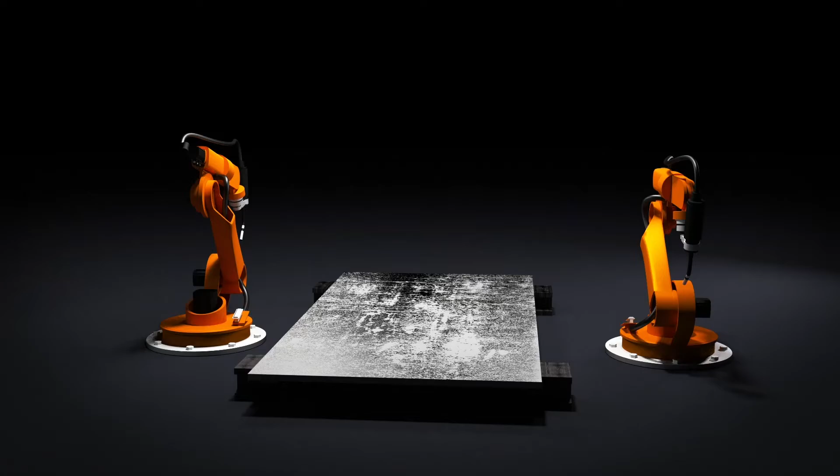Okay, so it's time to get into this first round of everything here. So I got the eagle all done, sending all the parts, so we can get after it.

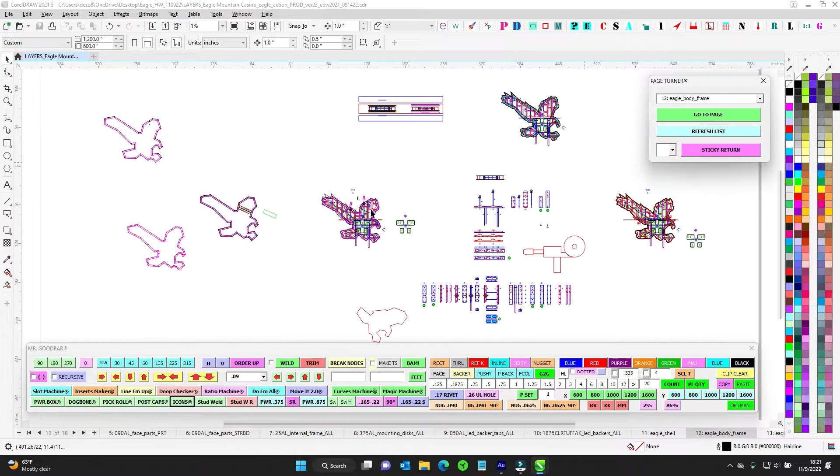So there's a lot of moving parts, as you can see, but a lot of it is just kind of what we do. It's just on a larger scale. So let's not let that intimidate you as far as all the stuff that's coming at you on this one. It's going to be pretty straightforward. We're visiting some of the stuff from like Indio letters and stuff, so it's going to be all good.

So let's get into the lay of the land. We do have a port and a starboard. That's based off of the beak. The beak is the bow. The tail is the stern.

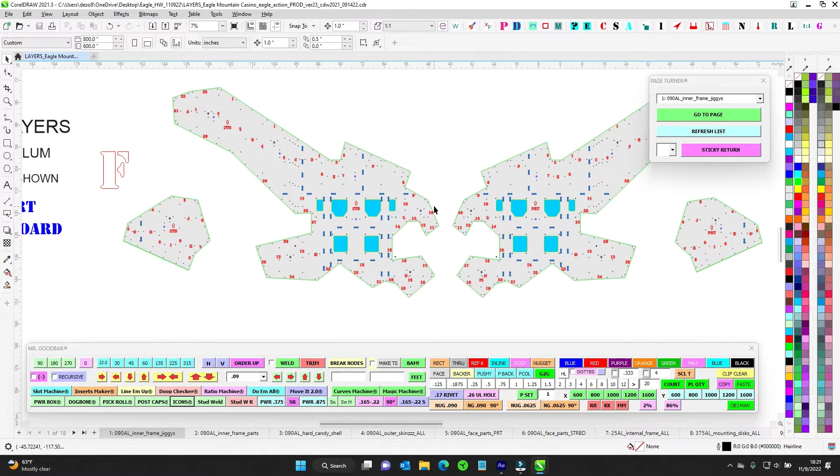So anything on the left-hand side is the port. That's where you pass the Dutchie. And then the starboard side. So look for STRBD and look for port.

This one has a gang of reference numbers all over it. You can remember my other video I did about augmenting that so I can get these numbers placed around. So look for all these little jiggy things.

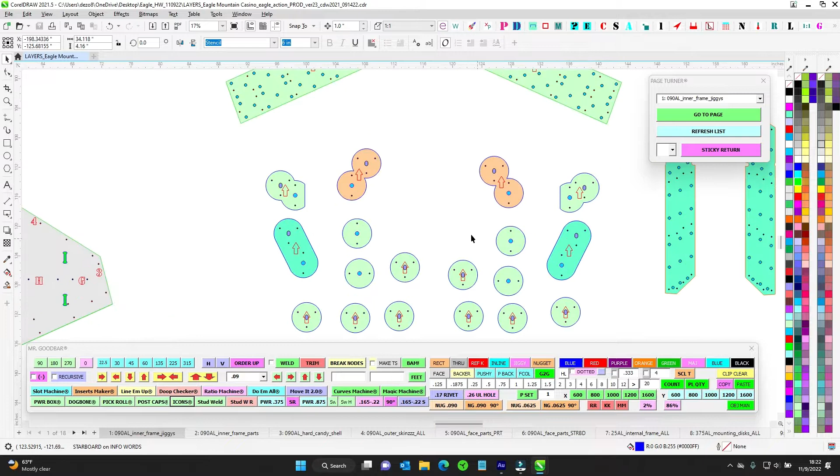This is a la Indio letters. You got the backer spacers because you're going to have that void. And look for these splice pieces here. We'll go over that. You got all your inner frame parts, and you got your hard candy shell. Look for all that. Port and starboard.

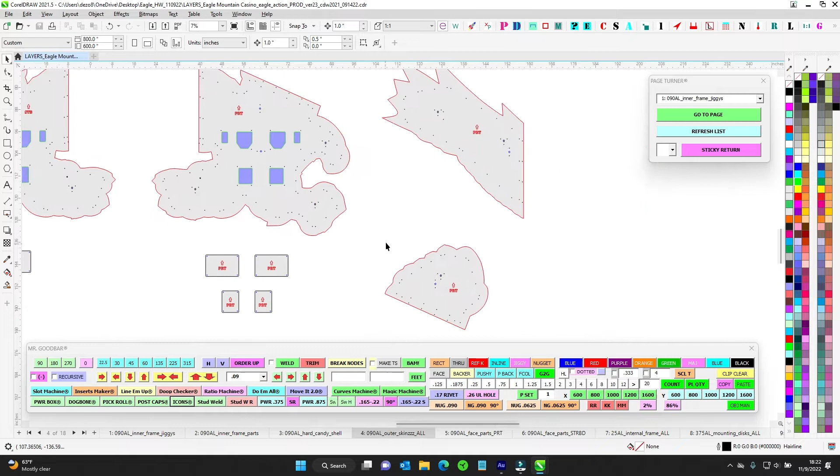Those are all together. And then you have your overall large skins, your finished skins. Look for all these guys. You got these little doors. Keep those in mind there. And then we have the actual faces. These are going to be the reverse channel faces for the eagle.

So look out, I got some keyhole slot coming. I did this piece as a tester, so this will look familiar. So you're already sort of familiar with this. So this one is actually port, and this one's actually starboard. So obviously everything's just mirrored.

So parts with an S on my chest, look for that. Quarter inch internal framing, look for all these parts here. We're looking for some of these are all the way through, some of them aren't. So pretty much the greens here are going to be all the way through, so make sure those are cut properly.

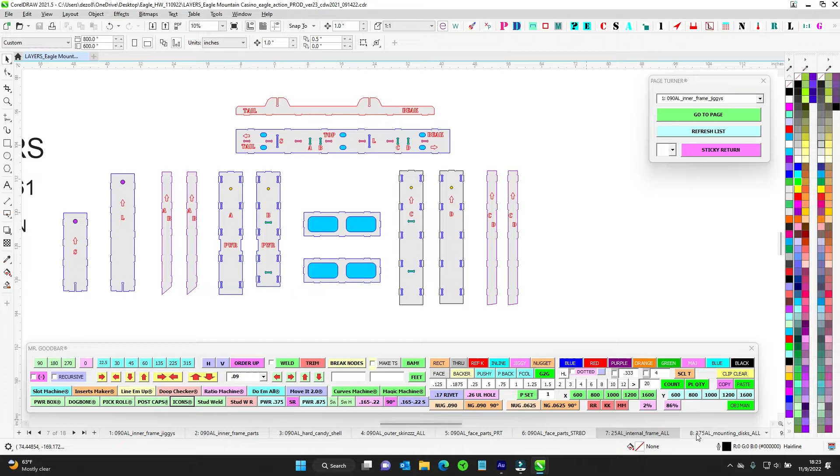And we're getting used to seeing these. So you got some 3/8 little slide collars there. And we all know what these are, these are little stubbies, little 1-inch tabs. And those are for both of those there.

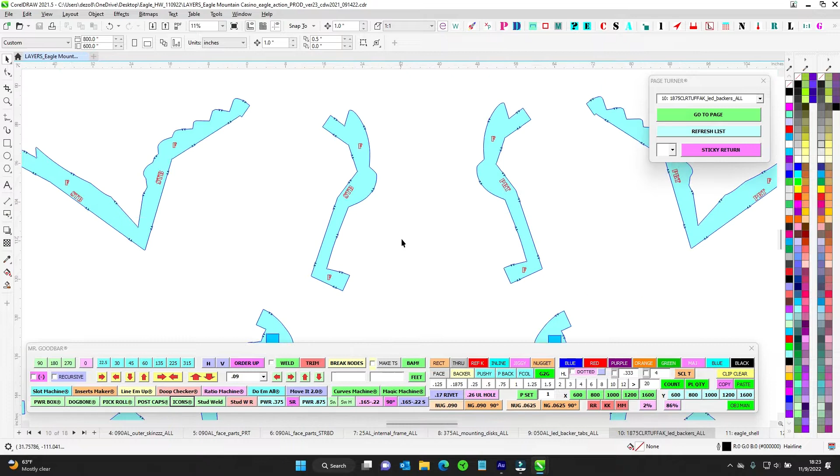And then we've got our Tuffak polycarbs like we do for our reverse channel. So we'll go over those. All right, let's get into it.

So what we're going to do is we're going to basically work from the inside out. So you're going to build this frame, get it all ready. And then once you're done with that, then you can start on both faces. So let's start with the main frame though. We haven't built it this way yet, but I think it's gonna be pretty cool. It's gonna speed things up.

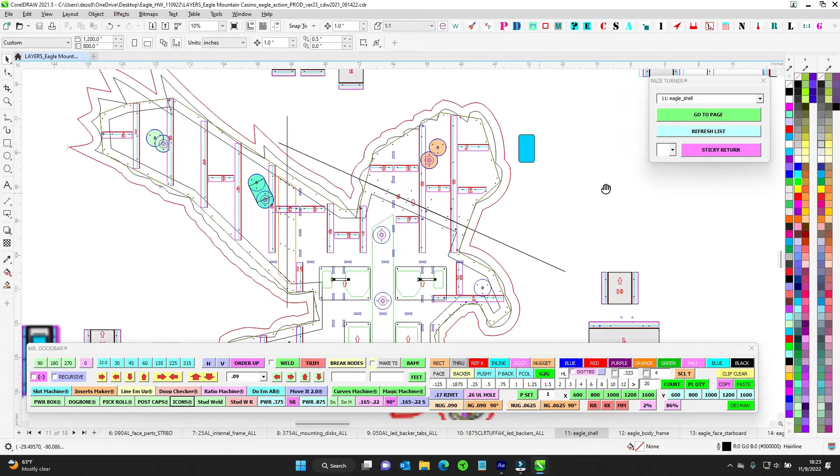So you're gonna look for all these parts that have letters on them. The letters are horizontals, and the verticals have numbers. So you're gonna work your way over here from the wing, and you're gonna work your way with the A and the B over here, and then you're gonna work your way down 1, 2, 3, 4, 5, and work your way through.

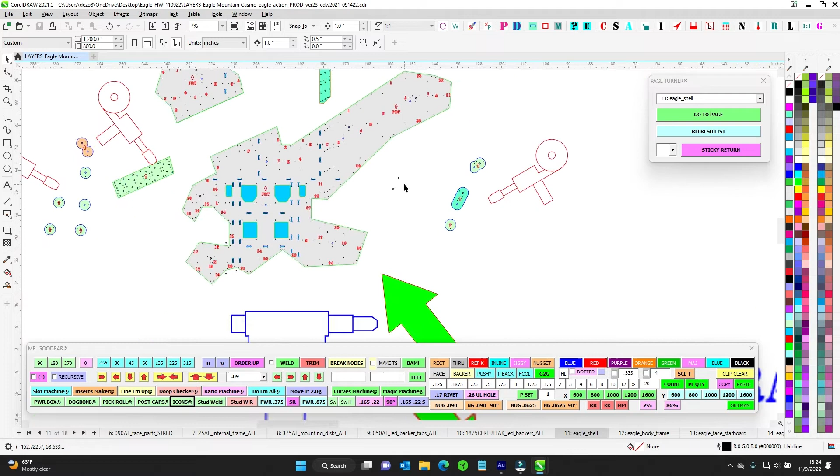What I'd like to see here, it should all work out, is that you're going to just rivet these two basically inner faces, the inner jiggies. These are big giant jiggies basically. You're just going to rivet those to these guys here.

Now you're going to want to make sure these flanges are all facing the right way. So reference this PDF that I'm going to send you and double check and make sure that everything is facing the proper way. Otherwise, this might poke out. You're going to have, it's going to be sad.

And then a lot of these have tabs that are going to stick out, and that's actually where you're going to through-bolt the slider doohickey there, so that way the frame grabs on the frame and has that strength.

So you can see where everything's put together. Like number 5 here has that flange poking out. You're going to make sure that gets clecoed in, and then that's going to support the whole face structure. So it's kind of important to get those going. Get all this bent up.

But before you rivet this together, you're going to build the inner frame. That's where we're going to start, the inner part, the 1/4 inch. So that's going to be the body frame here.

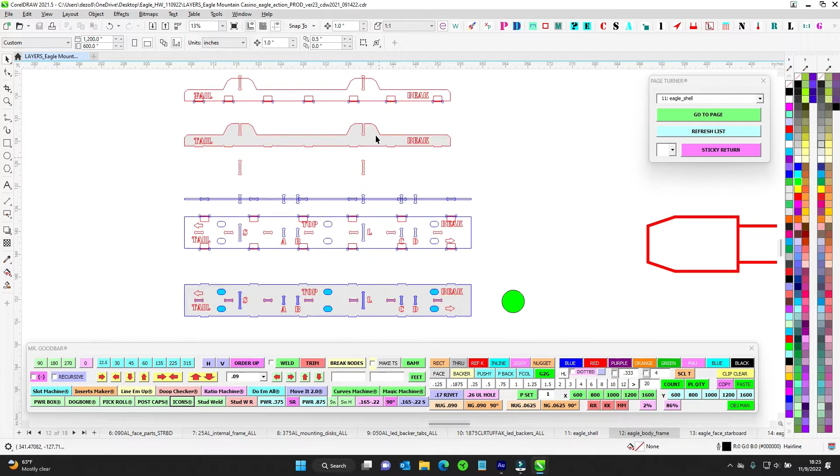Again, this isn't super hard, super difficult. So you've got two long ones that are going out, a long and a short. Those are going to be your lift points. So it's going to look like this all together.

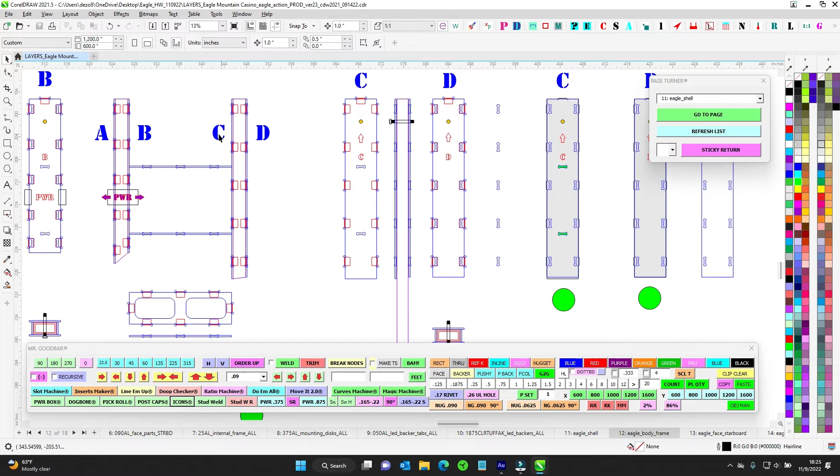And then what you're going to do is create sleeves for the 2x4 steel that's going to slide up in there. So you can see this is the side profile. You've got a C and a D, an A and a B, and then two little nuggets on the sides here that's going to basically create a tube. And that tube is going to slot into the bottom of this piece here.

Now you'll see this part goes to the tail, this part goes to the beak, and that's right here. So you can see what's in blue, right? So there's the sleeve there, there's your A and there's your B.

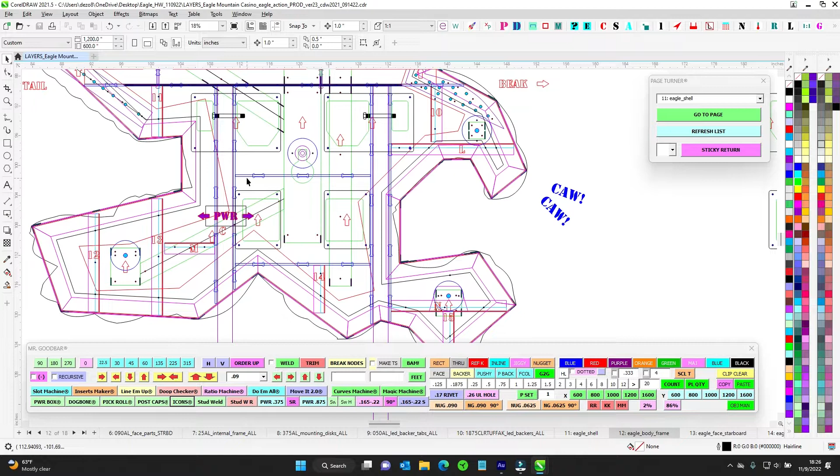And then this will be your in-between pieces. And then you'll have your C and your D here, and you can see where the tube will slide up in there, and then it's going to bottom out across the top.

So the top will have this rib across here, and then this part here will be a brace to help stiffen that. So if you're looking down at the top, you're going to weld that. And then these two guys here will have their slots right here. These will dog bone in to this guy here, and that gives you your lift points.

And so that's how install is going to grab, put clevises in here. They'll put clevises in here, and then they can lift this bad boy up and they can get their caw-caw on. So you're going to start with that.

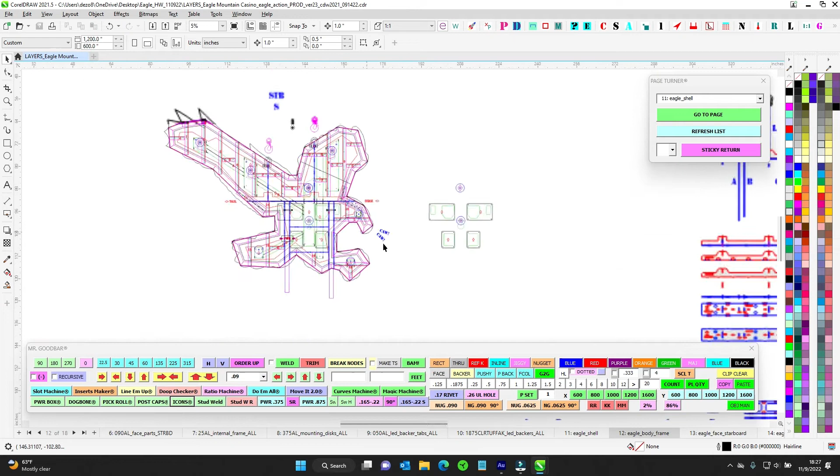I would tack this all together, weld it up good as best you can. And then all of these external dog bones, you can see here on this whole thing, these are going to slot into the Jiggy.

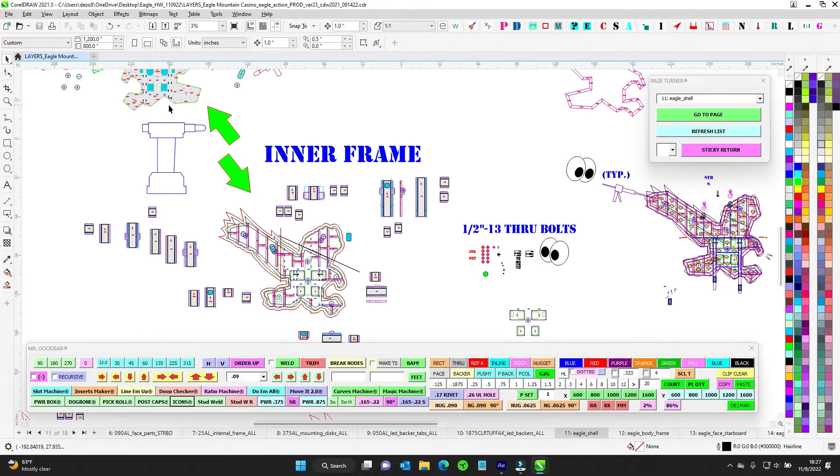So that's your side jig. You can see where all the dog bones here are going to correspond to that frame. So you get that frame built, get it kind of all put together.

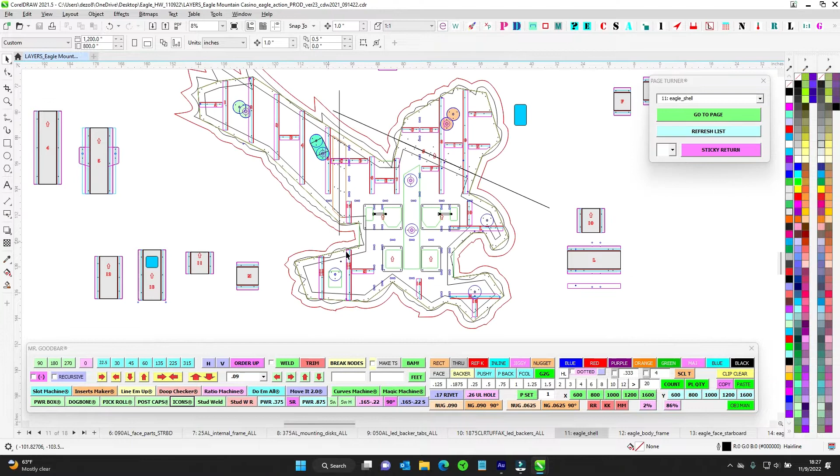And then I'm thinking what you can do is - again, I haven't done this before - but rivet one side. So get all of these, I would encourage you to Cleco it all first, get it all set. And then go ahead and rivet all one side and get all of these braces attached to one side of the jig.

Once you get this all put together, go ahead and lay it in there and make sure that it's all sexy. And then go ahead and lay the other jig side on, the other jig frame side, and go ahead and lay that on there.

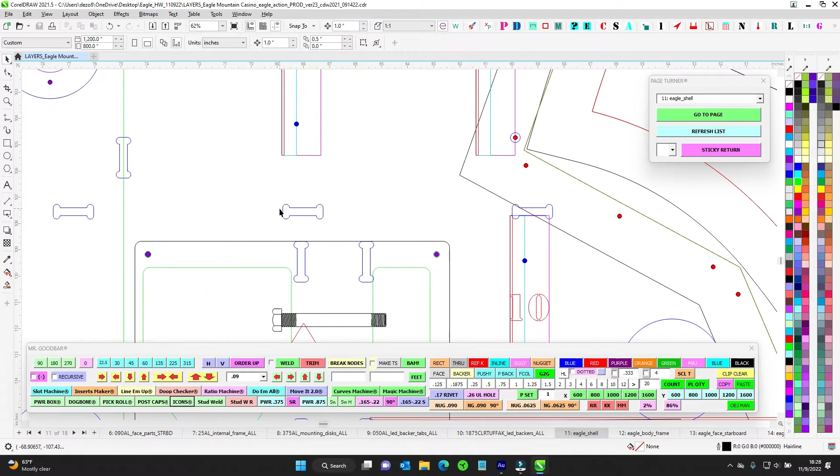And then you're going to have all of these dog bones exposed, so you can actually tack these dog bones, but anywhere you can get the gun in, go ahead and weld the frame to the 090, right?

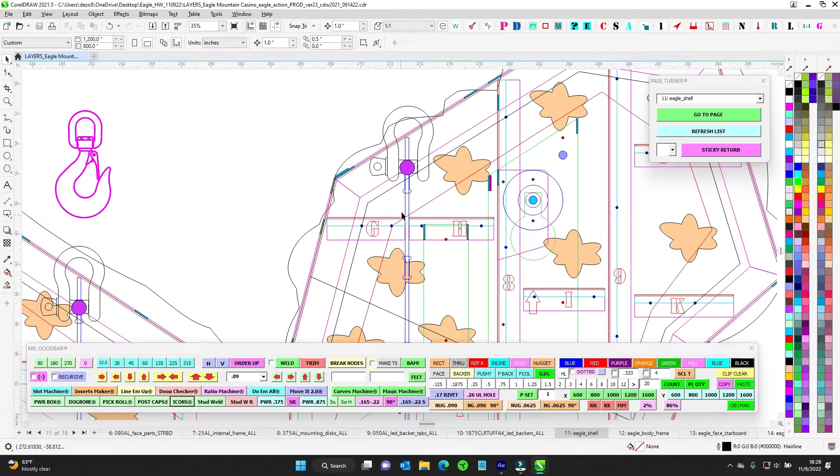So like here, you'll have an access hole here, and you'll have these two braces right up against this quarter. So if you can get the gun in there and kind of attach this brace to this quarter, that will help. It doesn't need to be crazy welded, but make sure that you can get in there.

You'll have access little doors here, so you can kind of get the gun in there and tack the 090 to the quarter here. You'll have access to these cross bars here, and you can get the gun in there and kind of tack to there.

So essentially, though, you're just going to make it nice and strong. You'll see here, you'll have an access door right here, so you can get the gun in and attach G and H to this vert. And then that way, when they go to lift, all your strain and all your stress is being transferred across this whole 090 face.

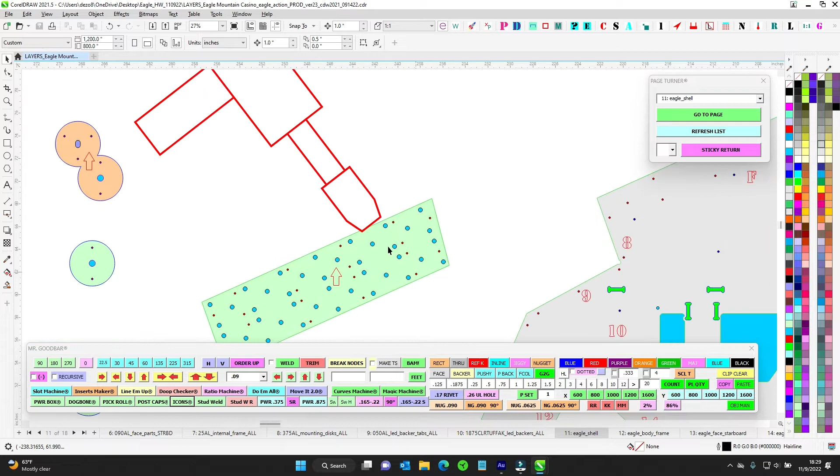Backing up a little bit, we have the braces to bring these together. This is just going to be on the surface. I gave you plenty of 3/8 holes here to plug weld and tack, so just Cleco this together. Do this on the surface, on the top outside, so all of these letters and numbers are going to be facing out. That's what we want, so you can see them. So go ahead and put this to the outside.

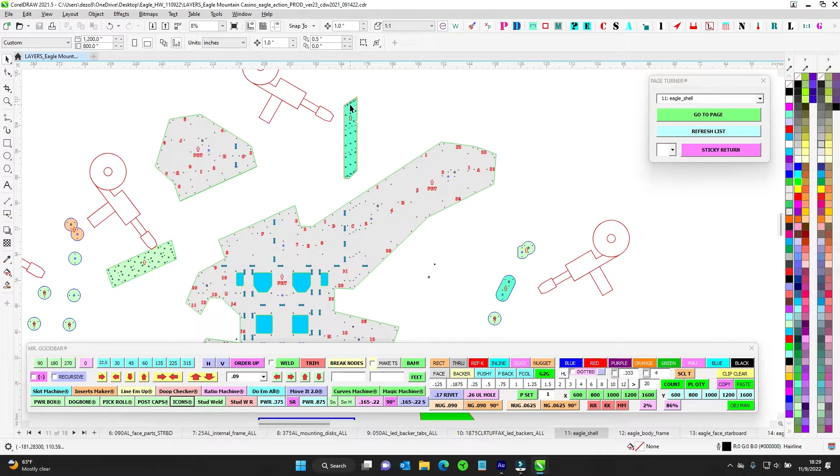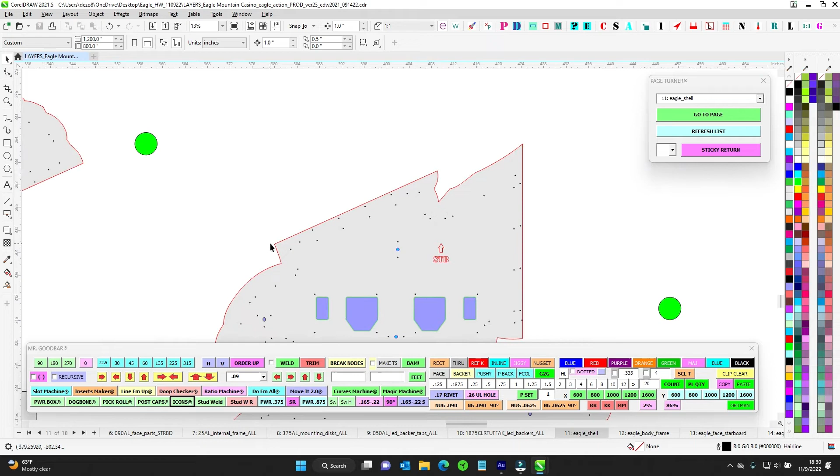And then same thing with this. This is actually a face seam. This is a redundant seam that doesn't do anything here other than you're going to build up this 090. So that way, when you go to put these faces on, you see that these were big enough that I had to blow these apart into 3 pieces just to fit on the router. So you're going to have to stabilize this seam. And so this seam, we're going to utilize the seam on the other one, and it's going to stabilize. It's going to do double duty.

So you're going to take this one, you're going to tack it to this, but you're going to grind it smooth, because then the top of this is going to be the stabilization seam for this one. But this one has its own stabilization problem, and so this one is just a stabilizer for that. This doesn't do anything for this other than just gets attached to that.

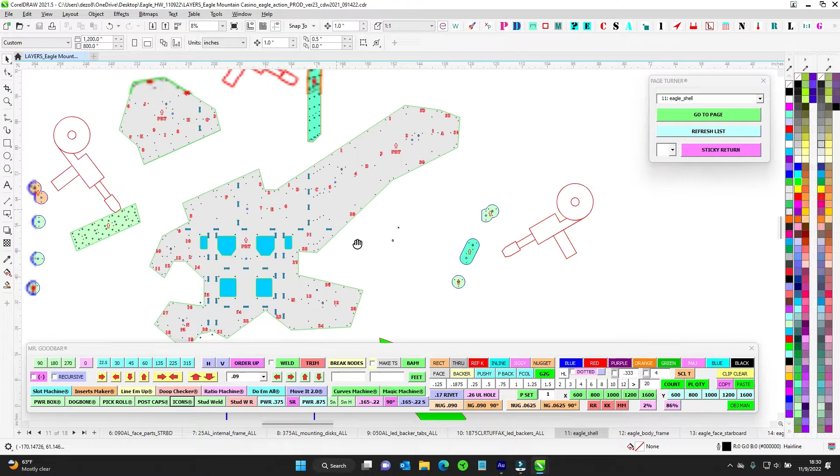So you're going to put that on there, tack it up nice, but we don't want to warp it too much. And then this one here, tack it up there real nice, but make sure it's clean. And the same thing here, make sure this is nice and clean and booger free, because then you're going to lay this bad boy on there and it's going to sit on that.

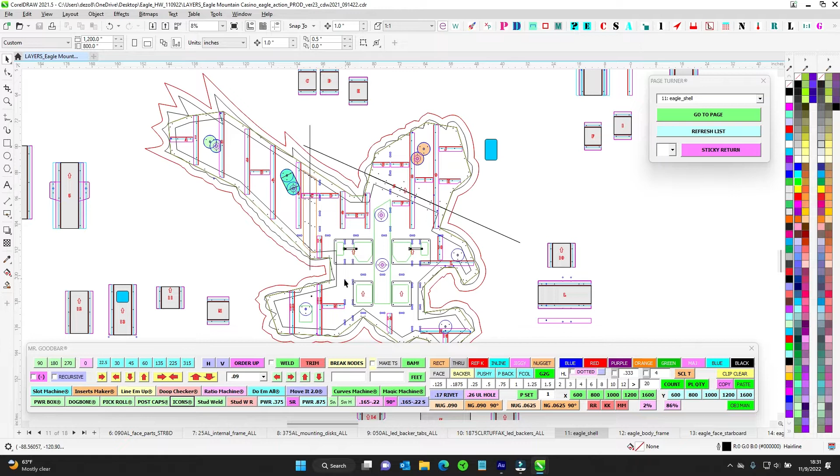So again, probably want to get this. Okay, so let's review. Do the blue frame first, get your quarter all tacked together, get it welded, and then put these together, seam these together, and then go ahead and tack or rivet one side together. Go ahead and put the 1/4 inch frame on the one side, and then bring the other face in, get it all dog boned aligned, maybe give it some tacks, and then finish riveting. You're just going to rivet all of this together.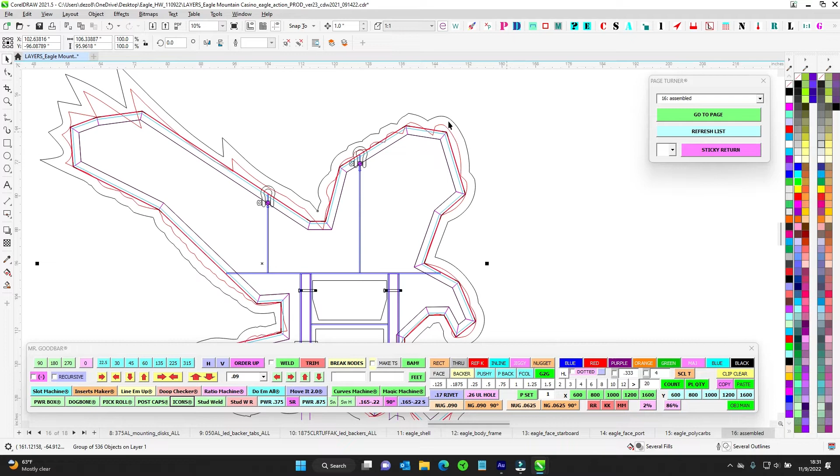Because we're going to have a gap, I already kind of talked to you about this, like talked to Adrian, but because this main face, right, is - let's see, I have an assembled version of that. That's right here. So you can see the black face here. Wow, that's a bad term. The face of color here is going to get laid all the way around this perimeter on this 2-inch framing.

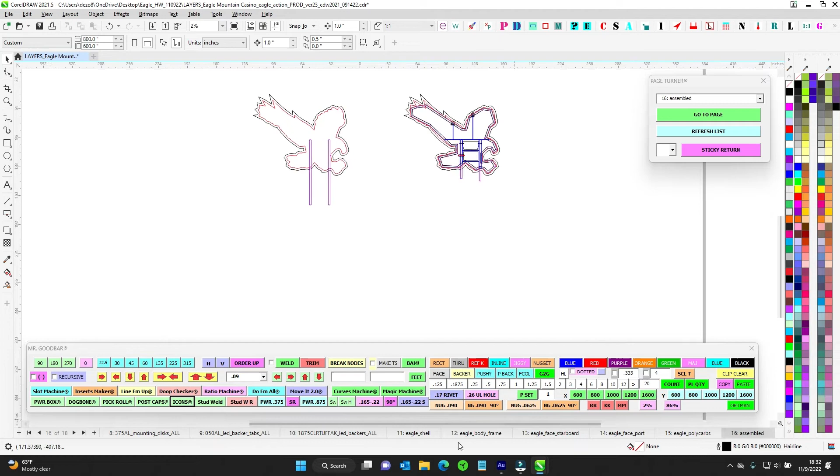Essentially, just like the Indio letters, this is going to be an 090 void all the way through here. So basically, you could push on the main back or the main face and go clunk, clunk, clunk. And so in order to have places just like the Indio letters, you'll see that these circles will want to get tacked on there, and those are going to be kind of spacers. That way we can bolt this together and it doesn't squish, just like the Indio letters.

So get your 1/4 inch frame in, get all these frame pieces riveted, and then go ahead and tack on all these little circles. Again, reference this, but make sure your arrows are up so you can see where that's going to go here. We're going to have a circle. Yes, jumping around, just bear with me here. So we're going to have a circle here at the feet.

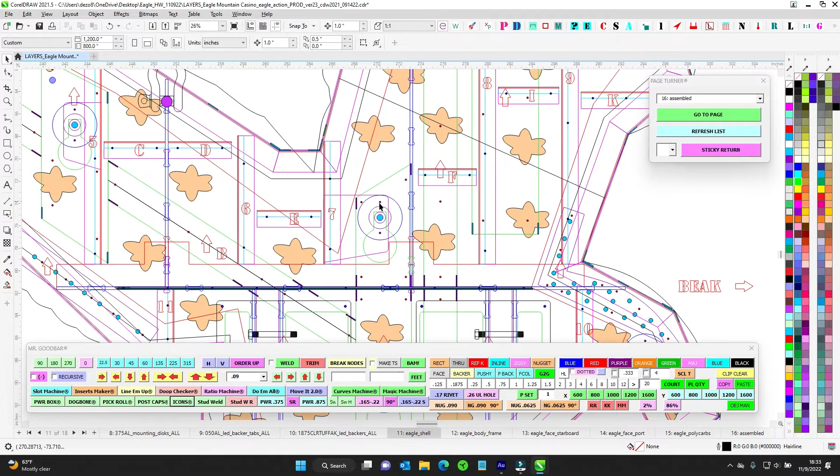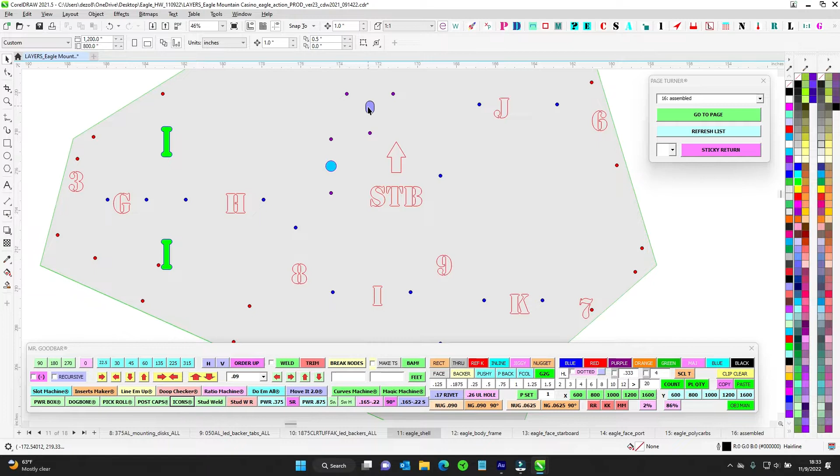We're going to have the circles at the tail, a circle here at the eyeball, a circle in the middle, and another circle here. This one will have a joined circle, and these will be weird-shaped joined circles, because we're not only having slides, but also using 5/16 hardware to nail this down. So this will be the 1/2 inch bolt hole for the slide for the 3/8 puck, but up here will be a riv nut that actually holds this thing on.

I kind of joined these two so that way you don't have a bunch of discs. You can see where this one is a weird shape, because the slide puck will be here and the 5/16 bolt hole will be here. Just make sure these pucks go in the right spot. I joined these up together as like a little oval here.

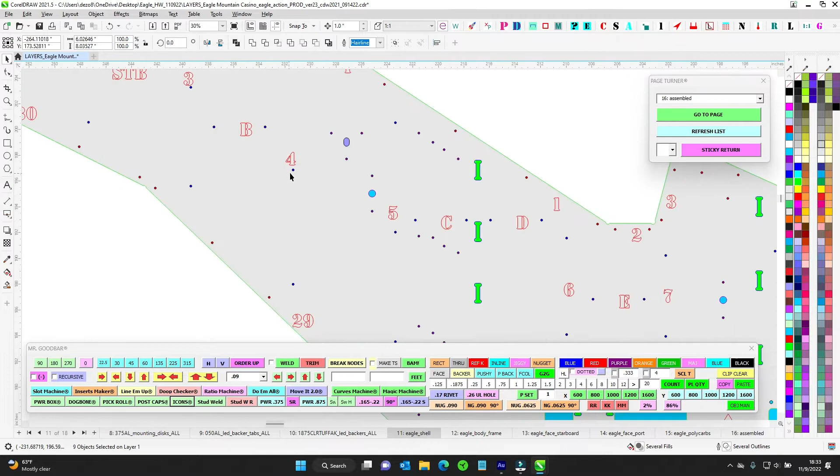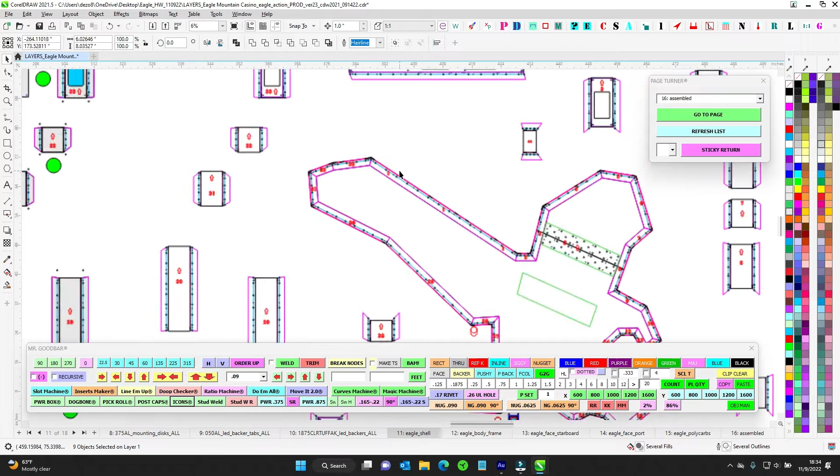Get these tacked on, get them cleaned up just like Indio, and then we're good to go there. I think once those are all done, you can start in with the hard candy shell. You can see where everything's numbered. It starts with 1, and you work your way around 3, 4, 5, and you're just going to Cleco this thing all the way. You got the 1 there, 2 there, 3, 4.

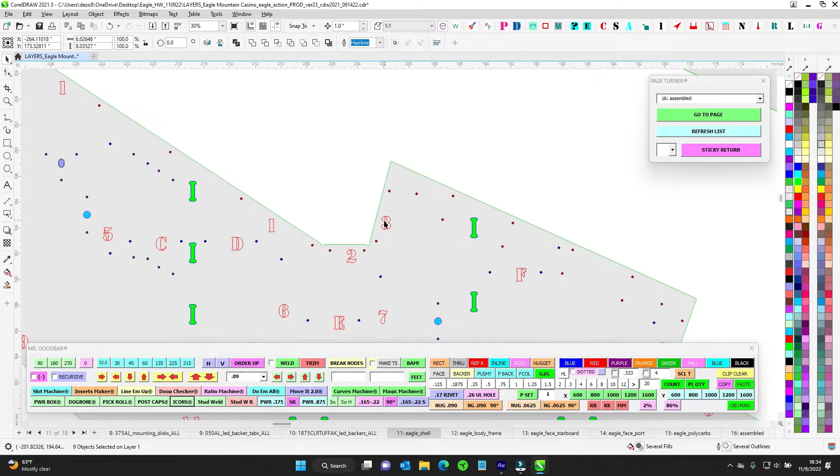This is actually probably going to be almost kind of fun. You'll have all of this riveted together. It'll all be braced, tacked and welded in. So this thing should be really rigid, and it shouldn't be a problem. Just work your way around. Look for the 1s, that's the number piece. There's 2, 3, 4, 5, 6, 7. Just work your way around and all the pieces should go together.

And then you're just going to go ahead - and I gave you this because I realize there's not really going to be any access to the inside, so this is going to be completely welded on the face. You'll be able to weld on the flange here, tack it on the flange, but I gave you plenty of 3/8 plug weld holes so you can just go ahead and tack these up nice, just like we do.

Go all work your way around. I got in between seams here so you can connect these, nice and strong. You can see I made little notches for you here so you can plug weld those up nice. And then you're just going to grind all that smooth.

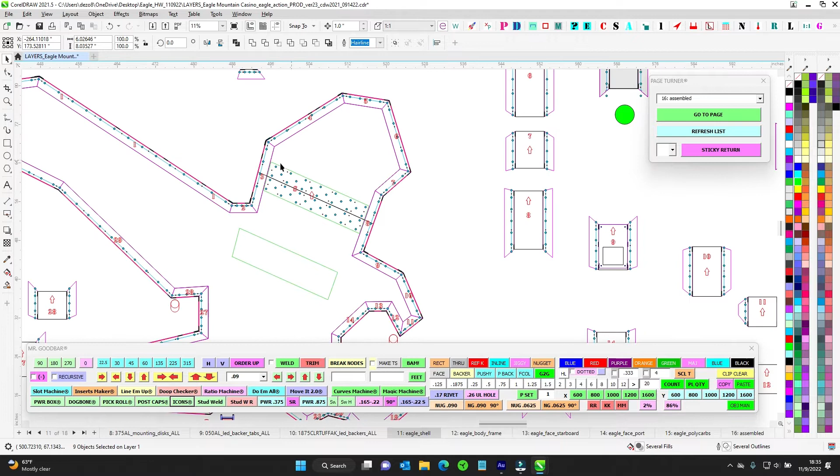Again, you can see where this is going to be the bridge. Go ahead and grind that smooth, and grind this seam piece there. Make sure this piece right here, make sure that piece is ground up nice.

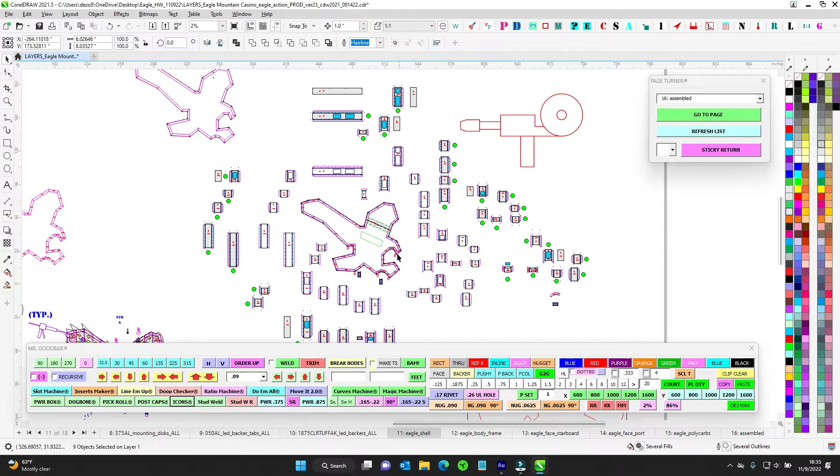So we got that done. You got all these tacked in, you've got these all in, these little discs. So I think you are ready for putting on the main face, the pretty face.

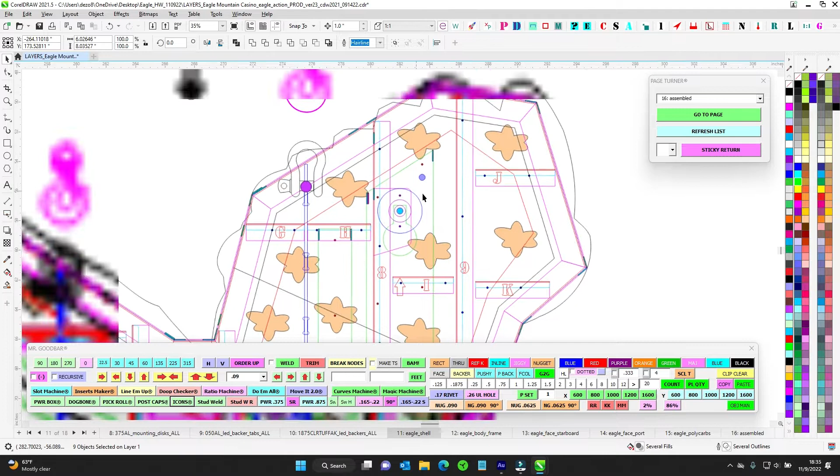Just like Indio, I would suggest a couple of you pop Lord's guns. You're going to burn a little bit of Lord's because, like we said, you're going to have the perimeter at 090, and all of this is gap that kind of needs to be filled. We brought in that DTM stuff - if you think you want to roll with that, if you want to do a test, we're pushing up against the expiration date. But again, you can see if you want to use it or not.

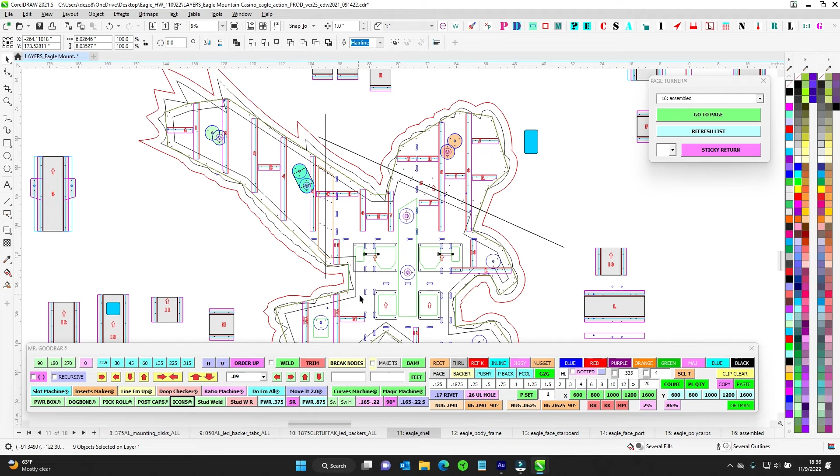But otherwise, we got to fill all these voids in between where all these little circles are here. You can see where the circles are there. So basically everywhere there's not a circle, we got to build up Lords, and that way it'll kind of float and be connected well. So that'll be kind of a procedure.

But then once we have that all set up - for reference here, STBD little reference, or the reference kiss does go inside. On the Jiggies here, you see all these. I want these poking out so you can see the numbers. But on these ones, you're going to go ahead and put the reference to the inside.

That way it's clean and it's nice and slick. So go ahead and get the outer skins then. Like I said, you'll have all that done. Get this all cleaned up.

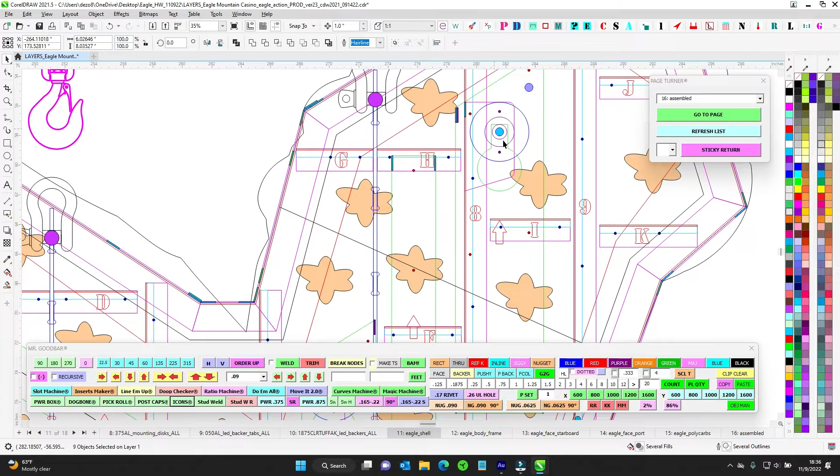One giant Lord's party. Make sure you put those sploogies on these right here, so that the welds Lord up nice on these. Make sure you do just like you did with the Indio letters.

And then once that's done and you've got the faces on, that pretty much does it for this. So again, there's a lot going on, but it really isn't.

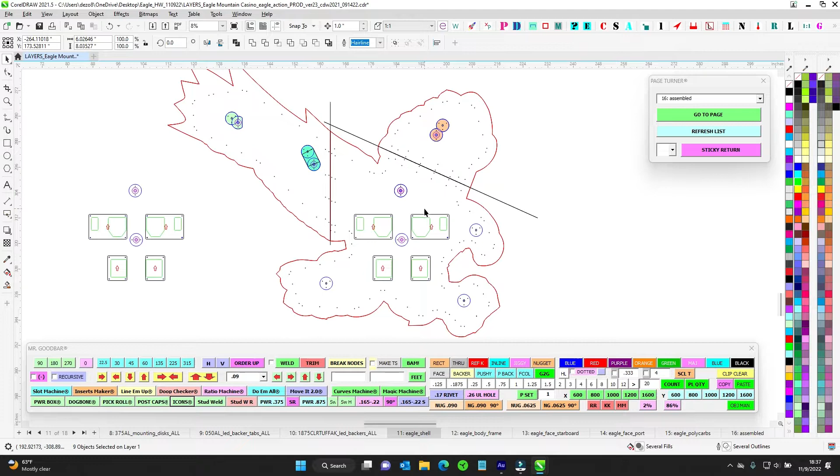Here's a good example. Essentially the 2-inch framing is it. And then these are the only other spots here that the eagle's going to actually touch. So all of this needs to be filled. Whatever you think works, you can put a little bit of Lords right there too.

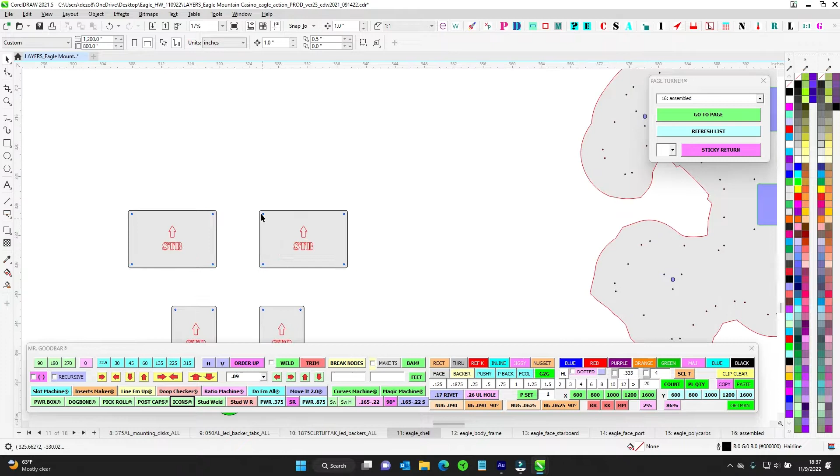But these are going to be outside access doors. These actually sit on the outside on top, so there was no reason to recess that. You're not going to see them.

Okay, so that's outer skins. That's the main part of the eagle. You'll have your sleeves that go in there, I already have holes for that. And then you've got all your doors.

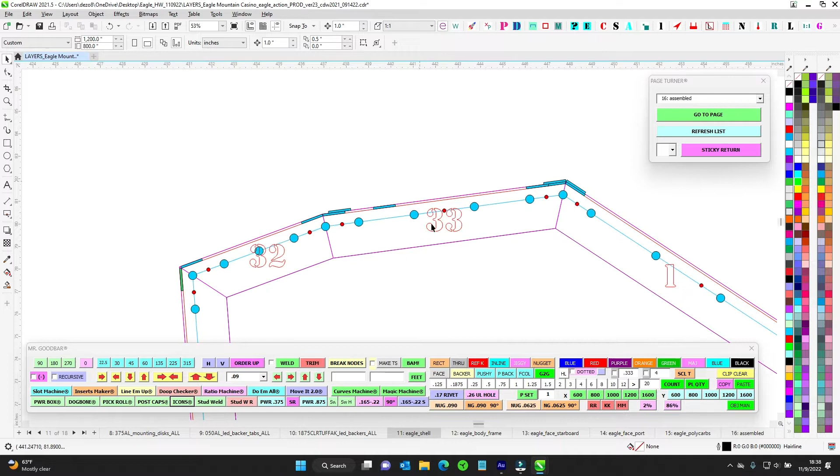So you can see where 33 will go with 33. Everything that's basically facing up, I put doors for access. So that's kind of how that goes. But anyway, so there's that. So we've got the frame, you've got all that kicking off.

So let's talk about faces. Faces really aren't that big a deal. These are going to be more like the agua caliente, the big palm trees you did, where you're going to bring these together as a seam. I already talked to you about these seams.

So you're just going to clamp these, bring them together, and you're just going to rivet them, just a cold seam. You're just going to rivet right across. And then before you do anything, go ahead and put these seam pieces in, similar to like you did on the other ones there with the eagle shell.

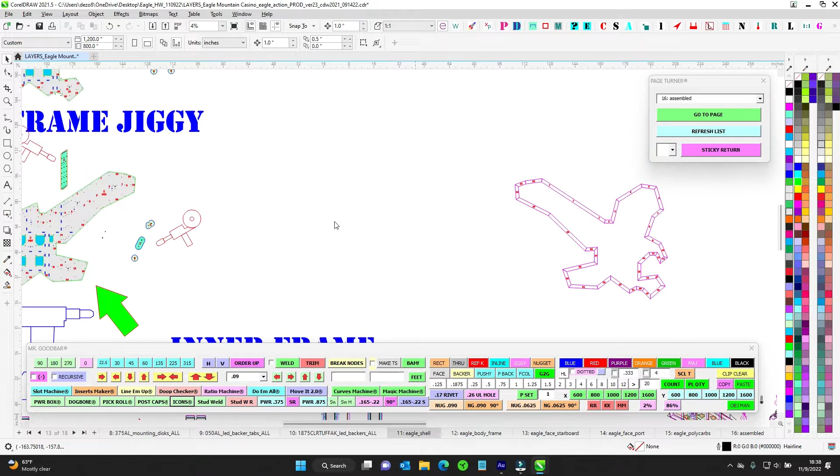Similar to this, you're just going to tack it together, and that's going to stabilize it, because you're going to have all of this unstabilized face. So all that needs to be stabilized. You're going to have a straight piece along here, and then you're going to have another piece right here. So go ahead and tack that in, and that's going to bring it all together.

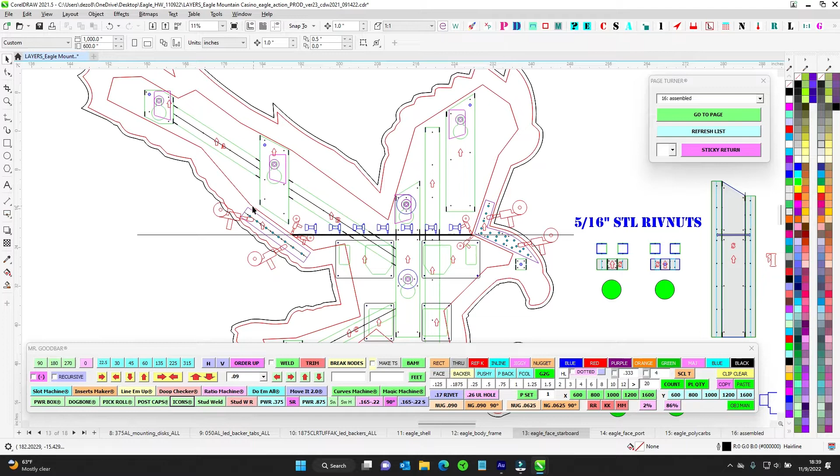So then once you have the face, these two pieces joined, and you have these splice pieces, you can see how much that's a lot to leave unstabilized. So once this is all stabilized, once this is riveted together, then you're going to do like you do with the agua caliente. You're going to stomp 22 strips at 1 inch depth.

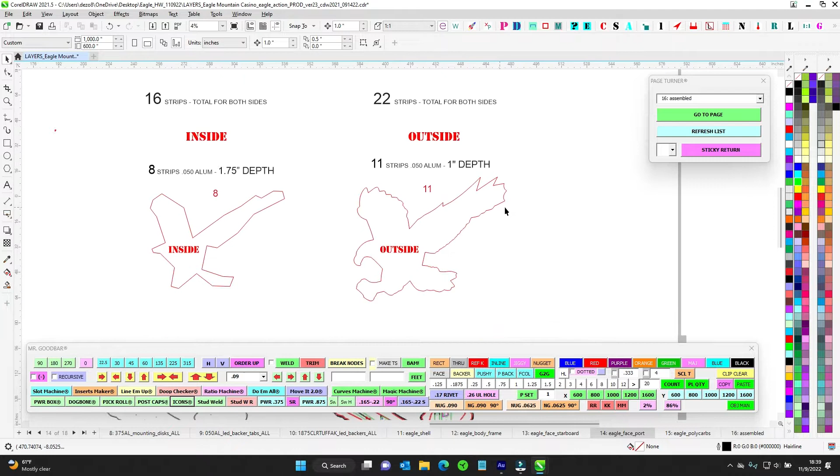So 22 strips, .050, 1 inch. That's for the outside of the eagle kiss. And then you're going to do 16 strips for both, that's for both eagles at 1 3/4 inch, and that's going to be for the inside.

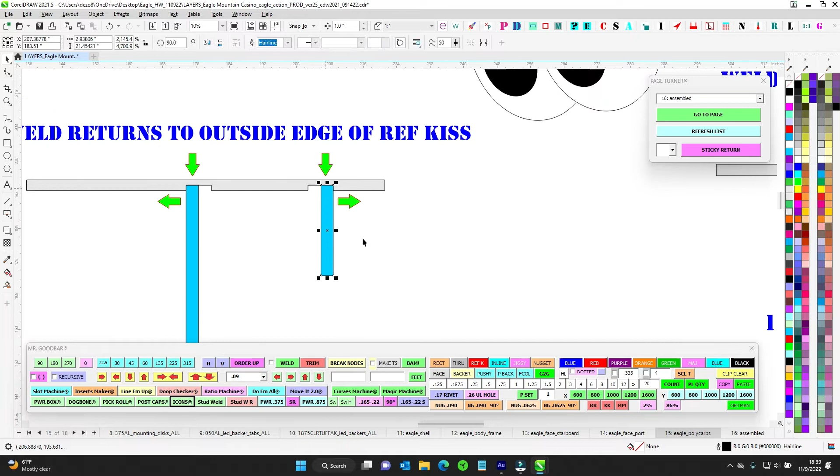Then what you're going to do is, just like I got here, you're going to push to the outside. You're going to push the return to the outside of the scribe. And then you're only going to weld on the inside. Don't weld on the outside because you can see it. We want to keep it clean.

So go ahead and just weld to the inside of the channel and do your 1 inch first, because that way then you can access your 1 3/4 inch. So the 1 3/4 inch goes to the inside and the inch goes to the outside. So you're just going to follow the reference kisses here.

So the 1 3/4 inch will be around this perimeter, and I tried to square it off real nice for you so it's easy to lay out. And then you do have to follow for the 1 inch. You're going to have to follow that a bit to make it look nice, but it's going to be cool. So you're going to do that with both faces. You can just kind of do both here.

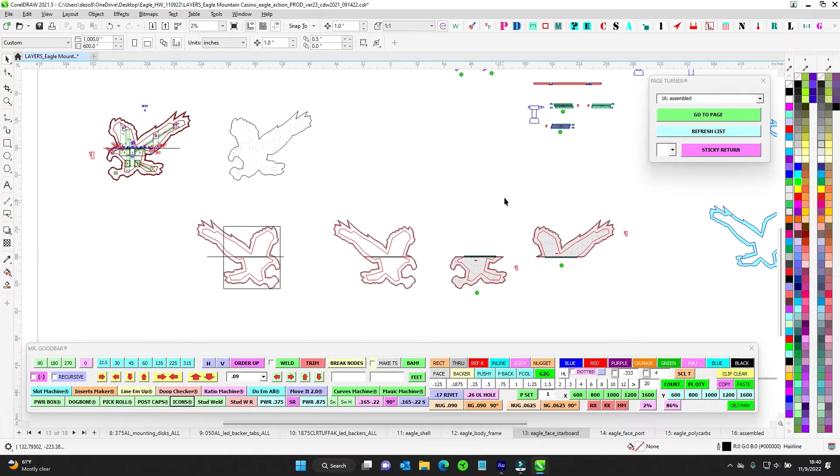So get your seam stabilized. Go ahead and go all the way around, first with your 1 inch, and then go around with your 1 3/4. Weld to the inside, don't weld to the outside so it looks clean. Then we're good to go there.

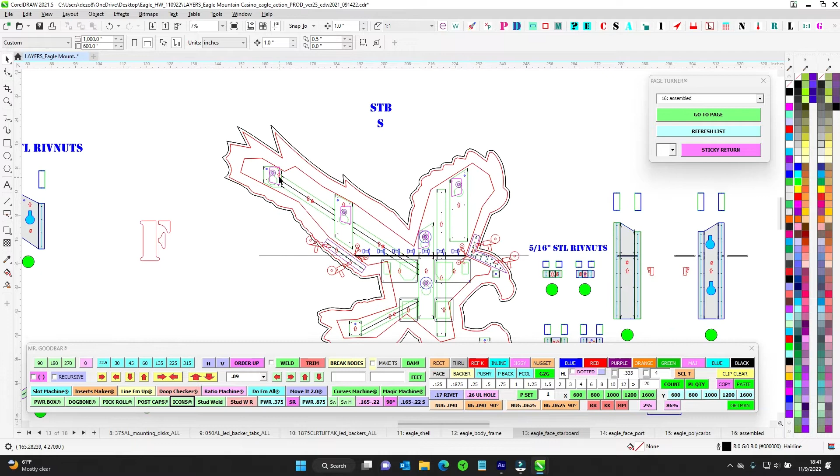Then you can go ahead and assemble all of your frame pieces for getting those mounted to the inside. Once you have your perimeter welded up and nice, then you can see how these things are going to fit. So you're going to go ahead and rivet. Remember, we already kind of made this one, so you know what we're dealing with. You're going to slide one into the other, and it's just going to be a big rivet party.

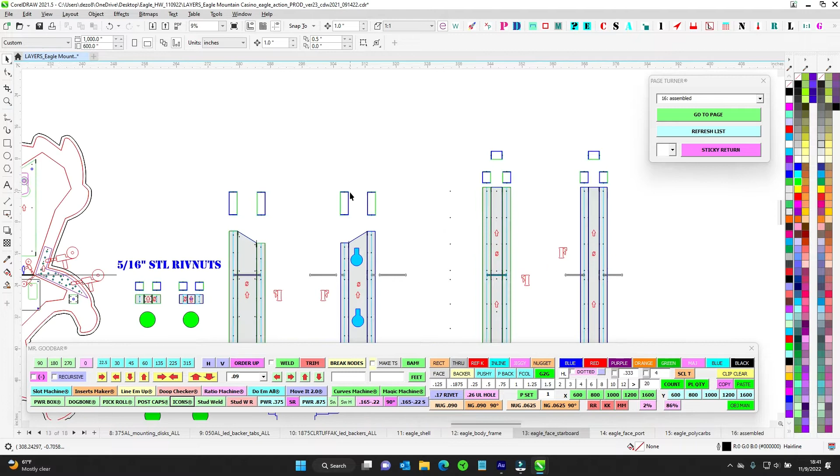So you're going to make these structures like this. You've got the green on the outside, blue on the inside. Put this one in there, rivet it together, put this in there, rivet it, put that, rivet it, all those. Then go ahead and do where it says, so basically wherever it mounts, you can see this little circle.

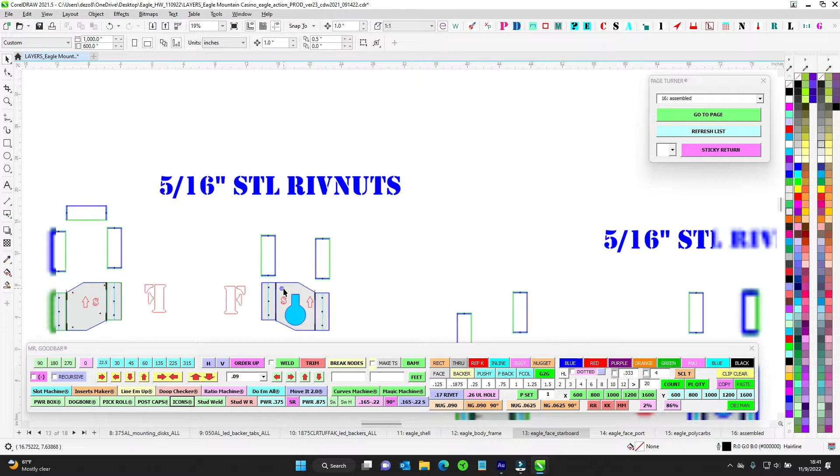You're going to have a 5/16 steel riv nut. You go ahead and do that, squish goes to the inside, and that's kind of how this actually attaches. You can see where that's where the riv nut is there. You've got one here, and basically, it's only where you can reach.

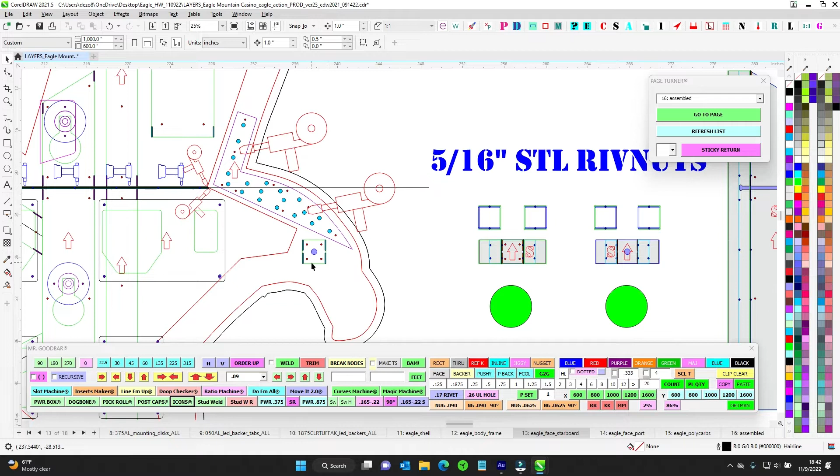Inside here, the installer's not going to be able to reach this one, but we'll do open head surgery here - open brain surgery. You can reach in, they can do a riv nut here. So this little doohickey, he's got a little mini guy here, you're going to do a riv nut on that. And then you're going to do a riv nut at the feet.

So again, the little door comes off, you can access that. And then this is actually where power and stuff is going to be. His tail here, or her or they, however this eagle self-identifies, this is going to be the 5/16 riv nut here. But also this is going to be the collection point for electrical. So we'll get to that here in a sec.

So go ahead and get all of these riveted together, ready to go. Then just follow here, and you've got Cleco holes here that match up where they should go on this bad boy. So then you can go ahead, and I think all we need to do is just tack it all the way around.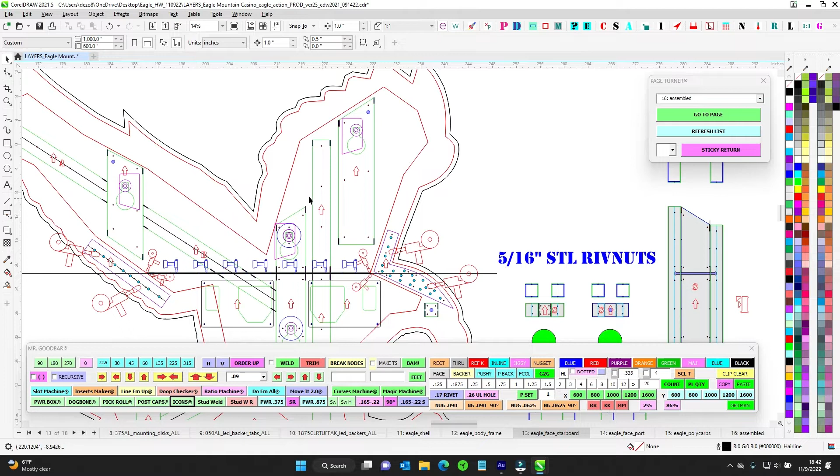Since we're already welding this face, it's going to have to be bondoed and everything anyway. So I think you Cleco it and just tack it, and then A and B will kind of fit in between here. You've got this tall guy here. So anyway, all of these guys will have to work to clearance all this stuff and make sure everything's looking sexy.

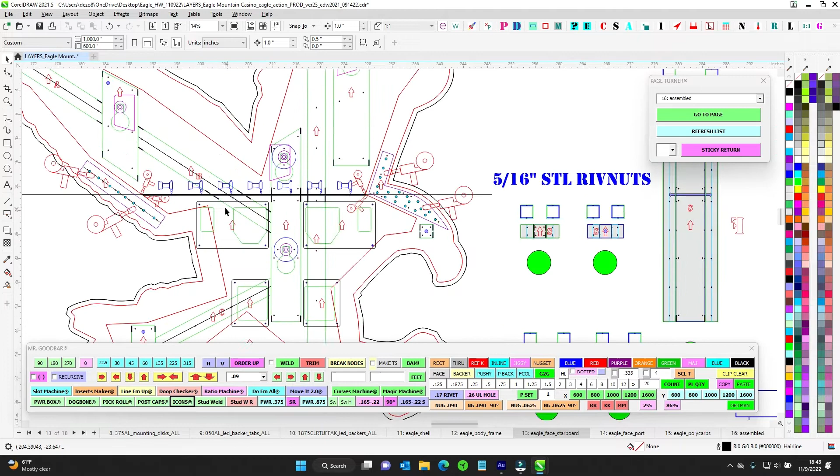So once you get all these tacked on there, I think that's it for the face. You just have to get all these built, get these tacked on there. And then once you have your return and everything, then we turn into reverse channel letter mode.

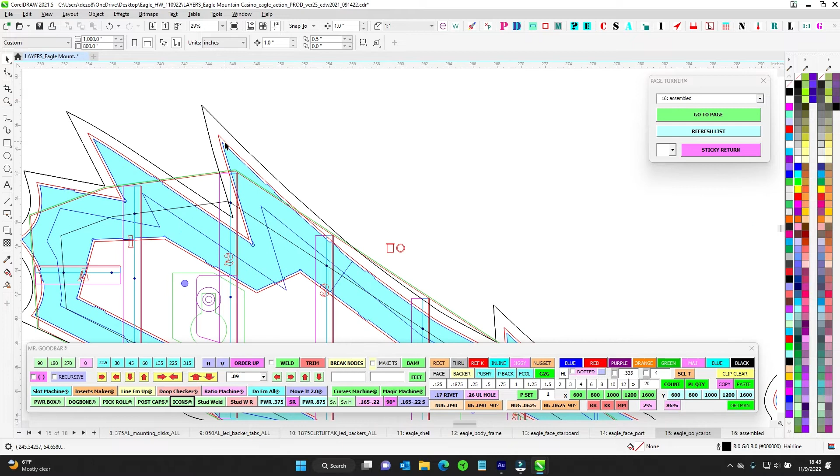Then you're going to go ahead and you can see where the polycarbs fit within the channel. You can see there's your red scribe there. I got everything grouped, but anyway, you can see where it fits. So then you're going to take your polycarb channel like we do. You have your port side, you have your starboard side. You can see where I have it broken up into chunks so it'll fit on the router.

So essentially you have 4 sections. You have this section, you've got this section, this top section, and then this comes around this way. And you can see where I have power collection there. So do your collecting and stuff.

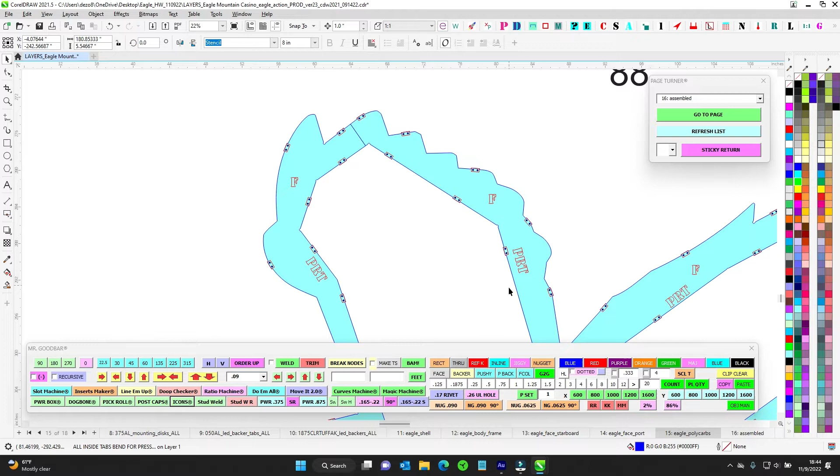Very, very important though - you are going to do tabs on both sides all the way around, but the inside is going to be pressure only, because obviously once this thing's up there, you can't take this polycarb out if you put screws to the inside. So no screws to the inside, only screws to the outside. That way, just in case they need to get in there at some point, I mean it would suck, but hopefully they don't need to.

But you can see where they have this much room between here and here to actually pull the polycarb out if they have to. So if you have screws only on the outside, they can maybe kind of pull it out, kind of service it if they have to, and then they can sort of jam the polycarb back in there as best they can, without having to lift the eagle off.

So that's it for that. Once you get your polycarb all mounted up, with your screws and everything, then later on we'll figure out what color to do, but we'll run our LEDs.

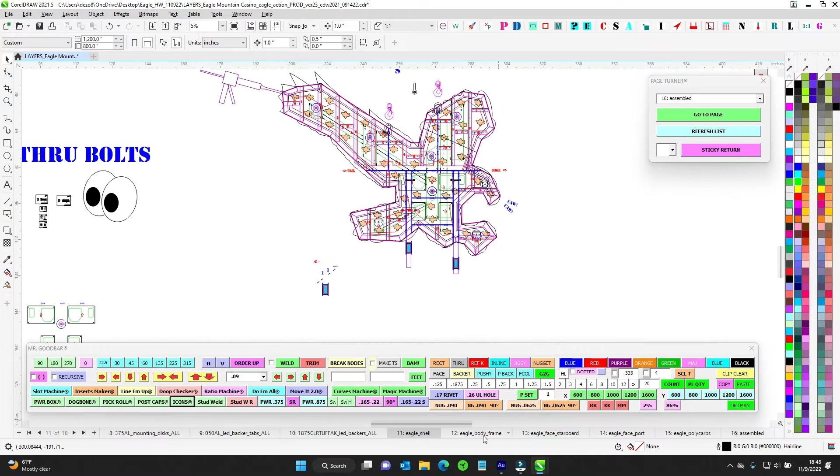And again, we'll collect a leash here, for leash and power. So you can see where I have power through here, on the frame. I went ahead and notched right here.

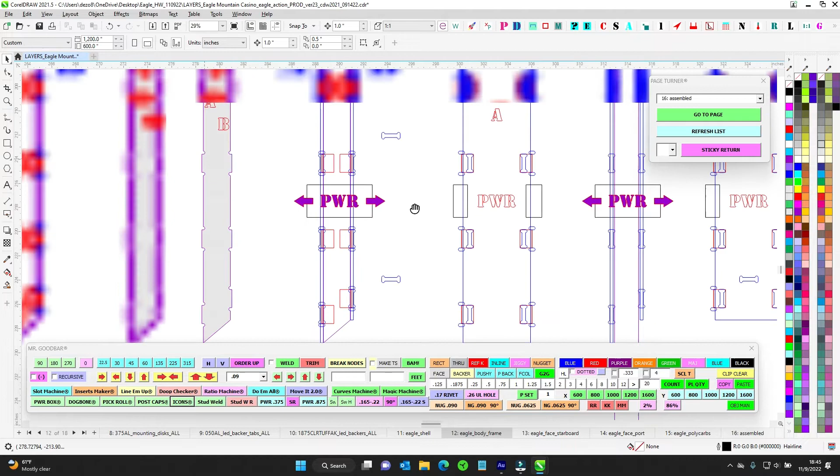I don't know exactly where the LED cable is going to be coming in, but it'll be coming into this cavity here, and then we'll run probably a cable and sneak it right in between this little crevice, and it'll go through here and through this little crevice, sneaking it through.

And then we'll collect here, because you can see where I have an opening - that's a door, so you can get in there. Also that's where they can do a 5/16, ratcheting right there, and then they can make their connection to the leash and sneak it through.

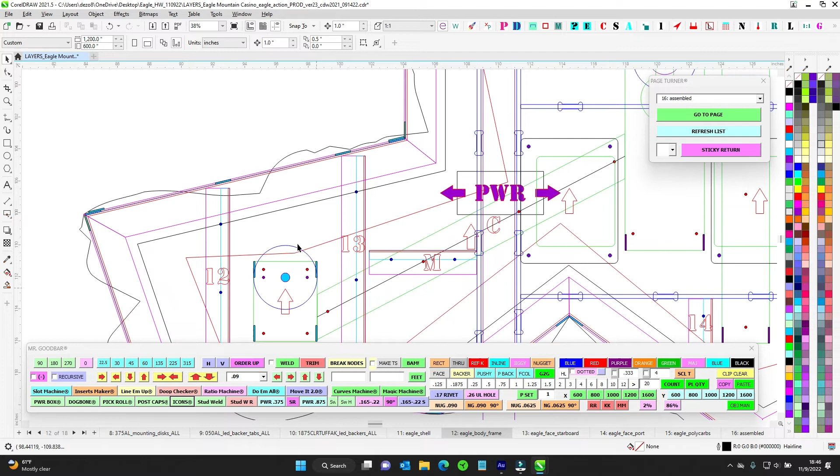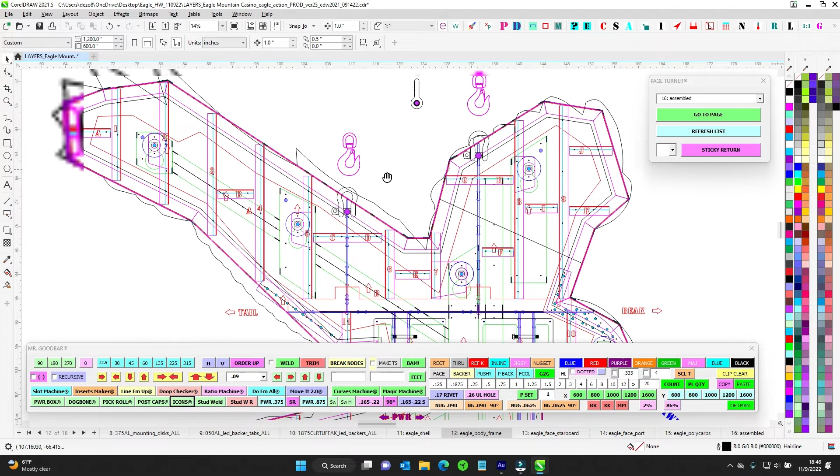And then again, I don't know exactly how we're getting from here down - that's still a work in progress, but at least we have junction points here. Essentially your collection is here, through here, into here. The rest of it, once it's sealed up, there really shouldn't be any reason to have to get up in there. Hopefully it all works out.

Otherwise, I think that should do it. Again, I'll be on site if there's any questions, but hopefully this is a lot of principles and stuff we've already done.

So like these guys here, we're just doing 1/2 by 13. But again, you guys have done this - you can see the sandwich where you're going to have the final skin, and you're going to have the little discs, the little letter discs, and then that's your big jig 090. You can see the sandwich, and how much void you're going to have there trying to fill that up.

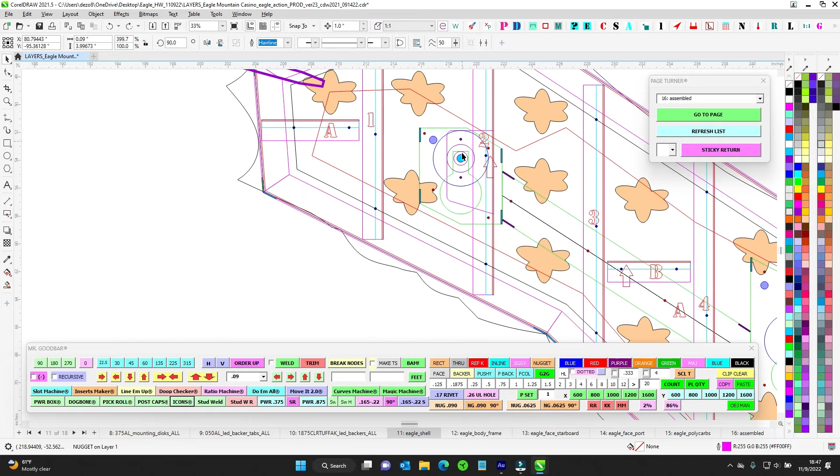But anyway, that's going to be where all these guys slide - you can see where they're just going to slide on in. You're going to bonk it in. So it hopefully should be pretty easy. One thing to think of...

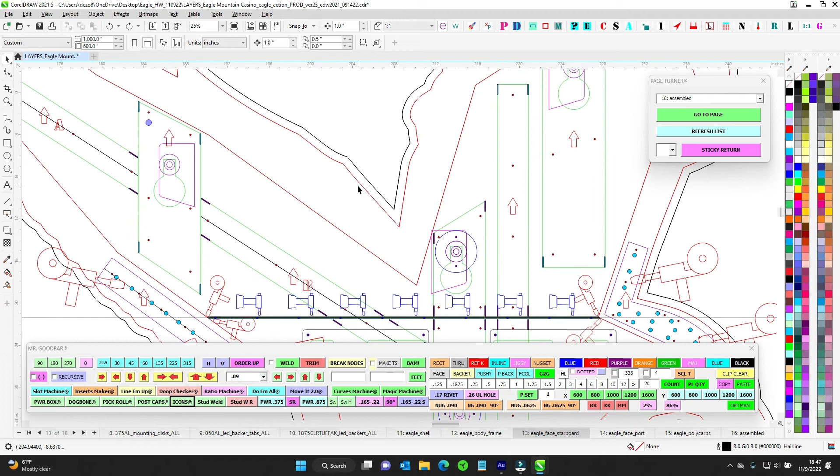Seeing how big this thing is going to be and how heavy and awkward it's going to be - once it's built, we will investigate with install whether or not we do like we did with the Agua Caliente big circle logos, where we take a piece of angle, drill it, put an aluminum nut on it, and make a lift point on the fly. Maybe we drill a hole through the return where the LEDs are going to go.

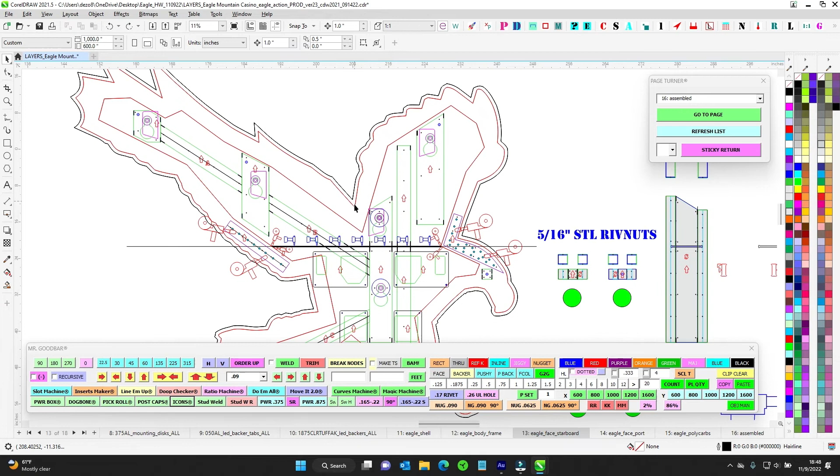Maybe we make a lift point on this thing, but it's kind of awkward. We'll have to see how big and heavy it is in real life, and ask - maybe install just wants to put it on the bucket, or maybe they strap it. I don't know, we'll have to figure that out. But be ready to possibly make some on-the-fly angle clips, and then burn a hole through so they can put an eyelet, maybe over here too, to give them lift points. We'll investigate that once this thing is all in real life and see what's up.

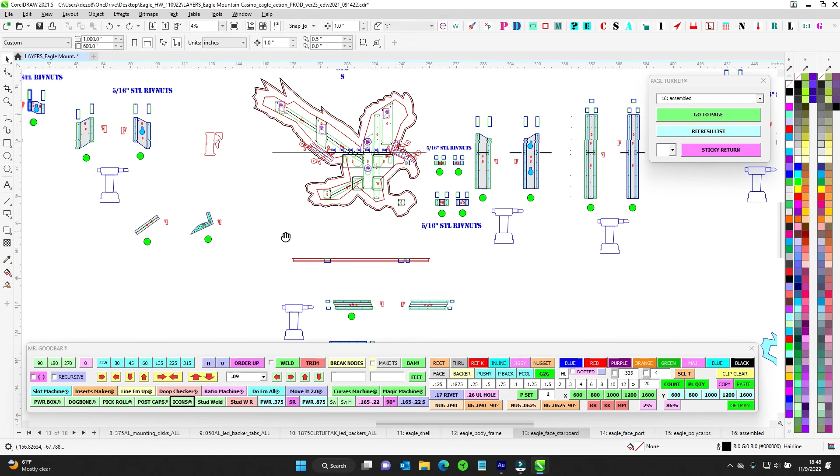But otherwise, I think that's it. Again, let's see - boom, riv nuts, reverse channel, polycarbs, these guys. I think that's it. So just a random anonymous eagle - if you just want to make one, that's how you do it.